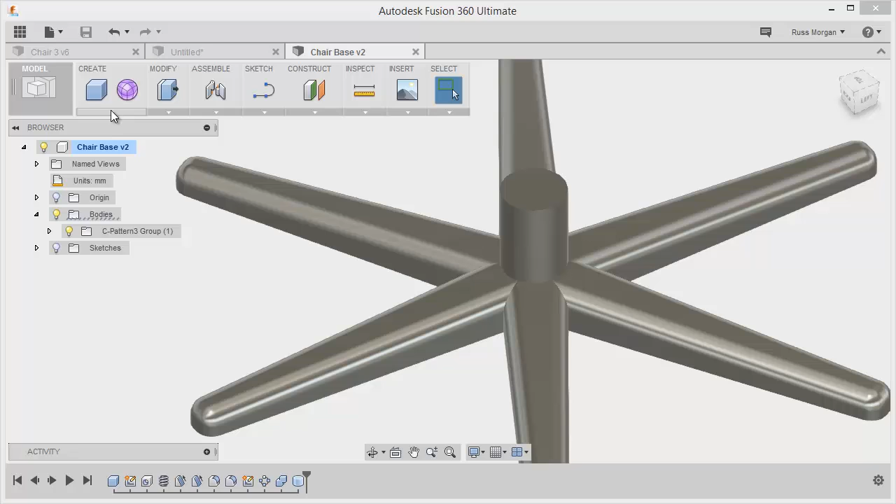So I'm going to choose hole, and I'm going to choose this face up here. Now it puts one in there, but I don't know if it's actually in the middle. So what I need to do is use - you can see it's not in the middle. It wants a reference point, so I'm going to click on the outside edge. That's the reference, and it now centers it all up.

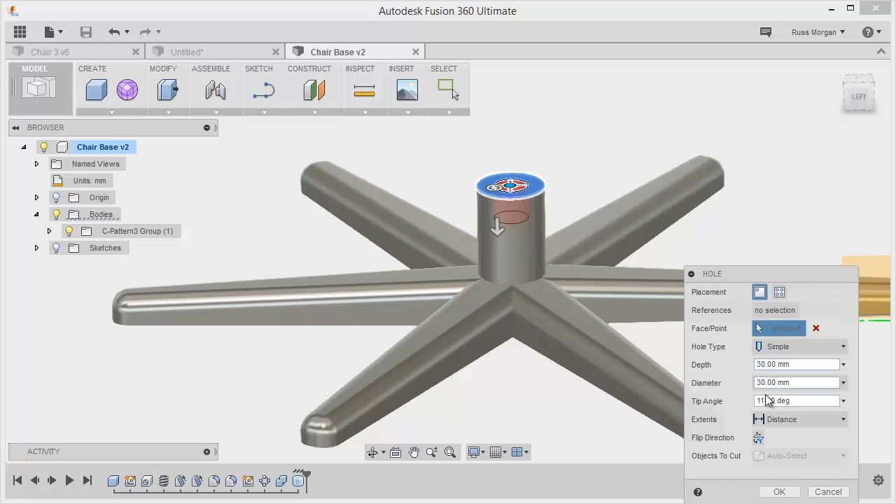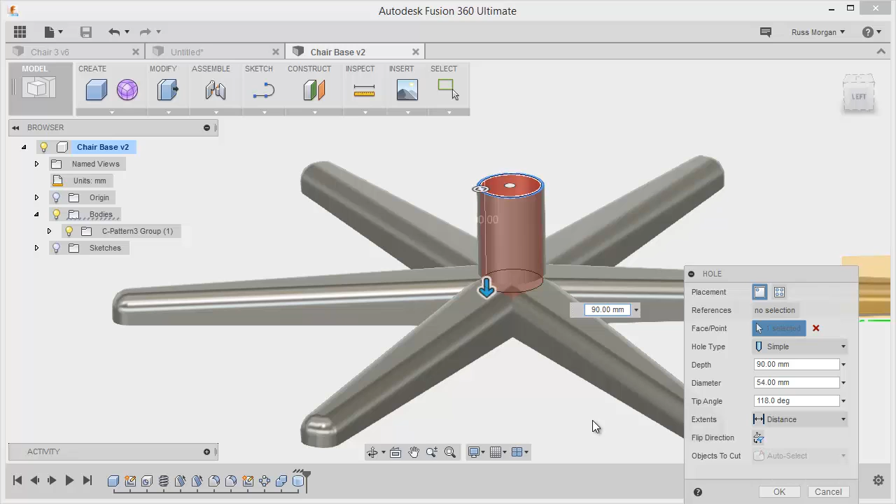Next thing is, what kind of size of hole do I want to put in? I can see that that one's way too small for what I need. The diameter of this was 60, so I've got to be looking at something in the 50s. So if I look at something like 54, and I see how that looks - that would mean the thickness of the wall of that metal would be 3 millimeters, which is probably about right. But it's not going anywhere near deep enough, so I'm going to pull that down further, take it into about that depth, so it's not quite going through, but there's plenty there to put a pipe into. I'm going to click OK on there, so I can see that's beginning to look quite nice.

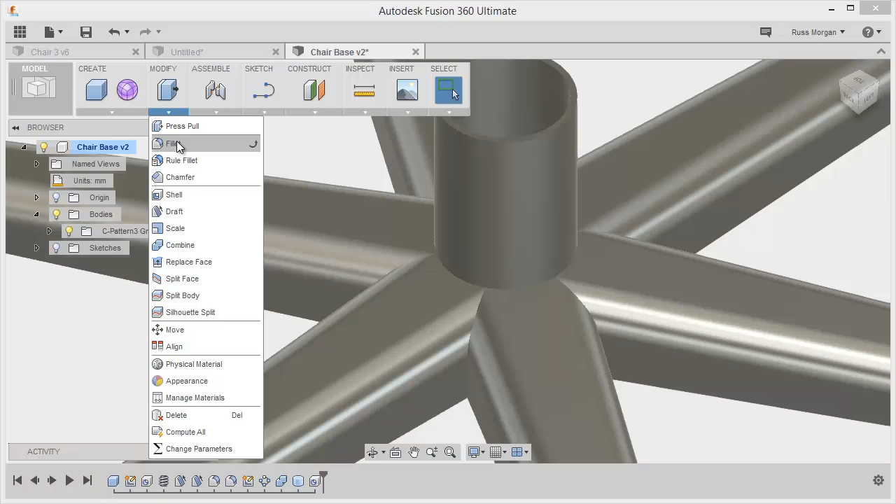I probably want to put what's called some sort of weld around the bottom of there to make it look more realistic. So rather than having that as completely flat, I'm going to zoom in a little bit, and I'm actually going to use the same technique again that we used earlier and use a fillet, and I'm going to click all the way around this outside area. I'm going to move it around to do that. They're all going blue. I think that's all of them.

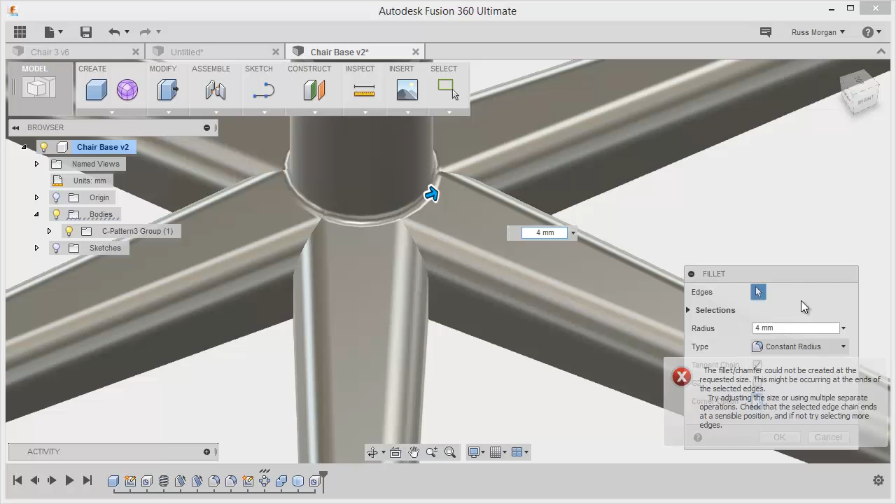And I'm going to try looking at something like maybe a 2mm fillet around there. That's a little bit small. Let's double that up and look at 4 - not 400, just 4. Okay, that looks a little bit more realistic for what we're trying to accomplish. And I'm going to bring it down.

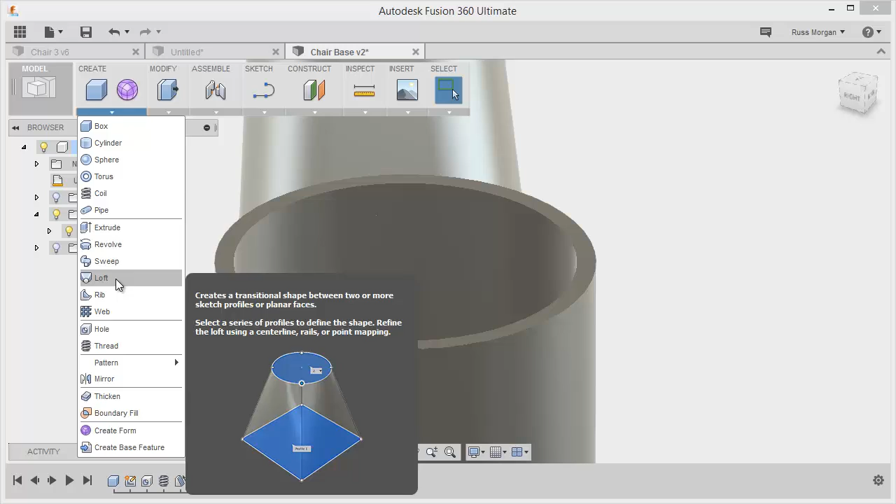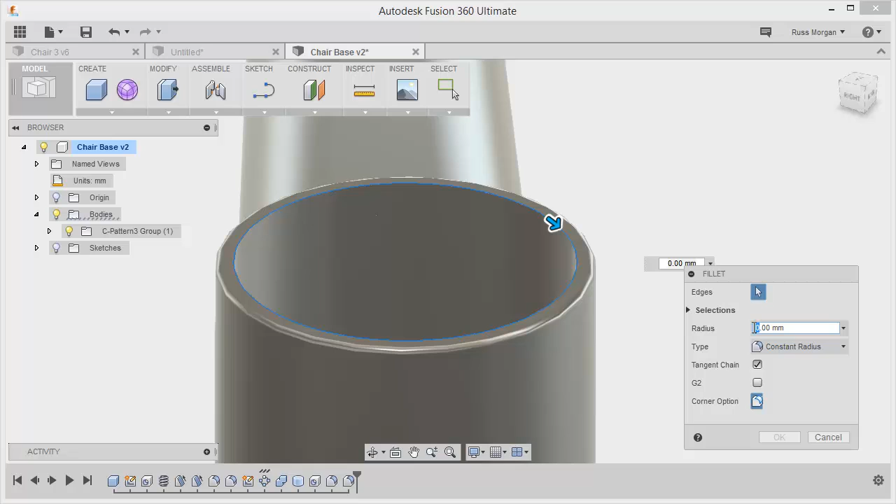I'm going to look at the top part as well, zoom in a little bit on there, and rather than have this tight edge on there, I'm going to try and put a little bit of a chamfer on here to make it look nicer as well. So same thing - sorry, not a chamfer, a fillet - I'm going to put a fillet around this outside edge. This one's going to be a bit smaller, we'll try 2mm on there. That's too big, try 1mm. So it just takes a little bit of that edge off it, and we might even look and see if we do the inside edge what that will look like as well with a fillet on it, because in reality, when you push the pipe in, it would be easier for it to fit if it was slightly rounded. So I think that looks better, so we'll say OK to that.

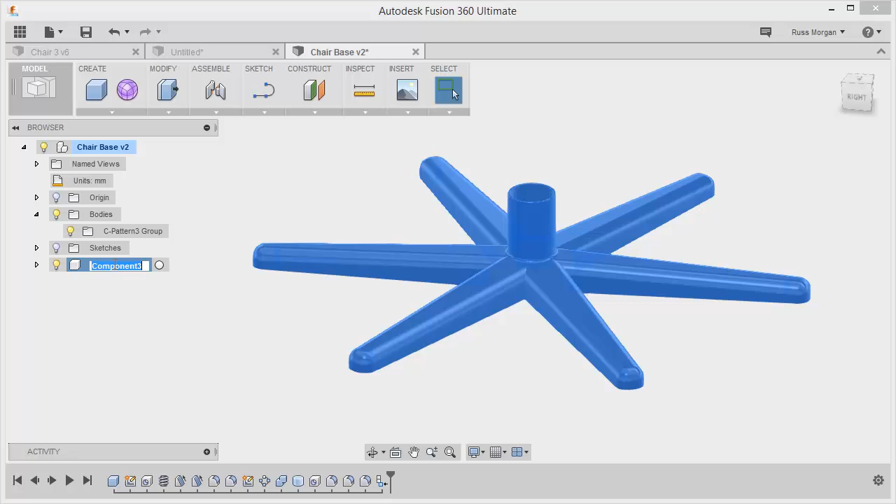Okay, what I might do now is make a component out of these things. So I'm going to actually come up to where it says bodies, and this whole body - if I turn it on and off - I'm going to right click on it and say create a component. So now this is my component down here, and I can rename this, and I can call it something like Starbase, because that's what it is.

Okay, so now all I need to do to this one is to maybe add some casters to it.